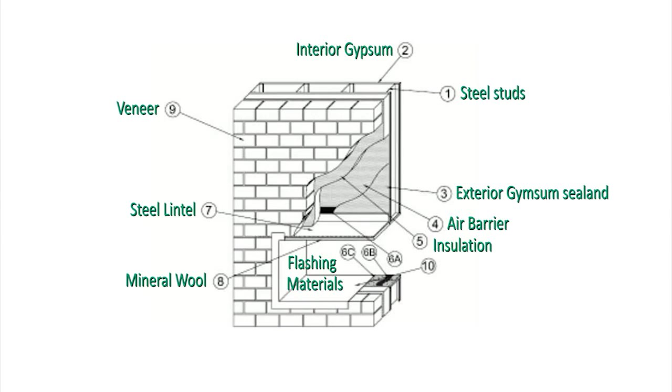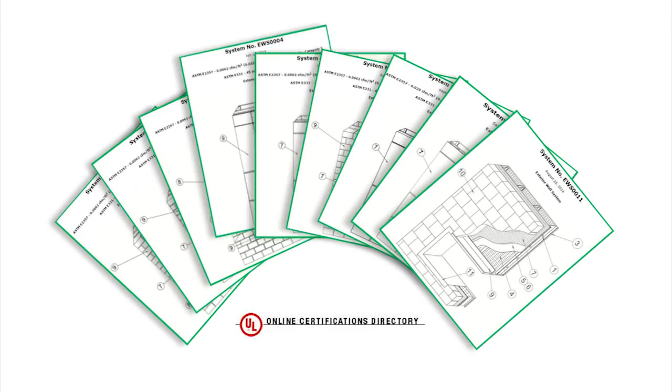In order to meet the NFPA 285 requirement, a wall assembly must contain test-approved products or be reviewed by a qualified engineer familiar with the fire characteristics of building materials. Products have to be evaluated in a variety of NFPA 285 assemblies before a valid engineering judgment can be made. Tremco has multiple tested assemblies listed with Underwriters Laboratories Incorporated that meet the requirements of ASHRAE 90.1 as well as NFPA 285. This makes it easy to identify what system components were tested and evaluated.

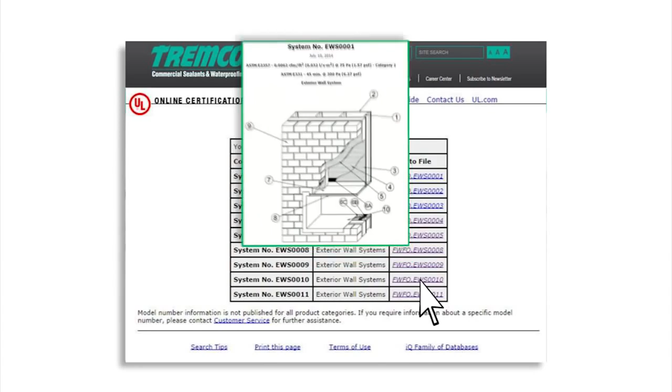To access Tremco UL-listed NFPA 285 assemblies, visit www.tremcosealants.com. Click on Technical Resources on the right side of the toolbar and scroll down to Technical Bulletins. Locate the ASHRAE 90.1 and NFPA 285 defining and specifying to meet IECC and IBC bulletin. Click on the UL listings for Tremco underlined and highlighted in blue. The online UL certifications directory will appear. Type in Tremco and FWFD for the UL category code and then click on Search. The listing of Tremco NFPA 285 assemblies will appear. Click on FWFD.EWS0011 to pull up the EXOAIR 111 NFPA 285 assembly, which contains a detailed listing of the components used.

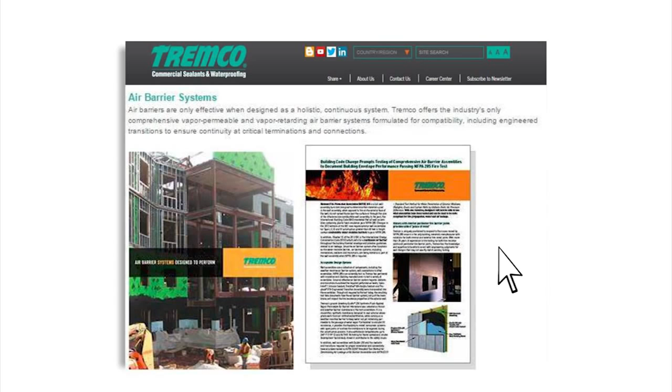When specifying an air barrier system, be sure to confirm with the manufacturer that the product components within the wall assembly have been tested in accordance with NFPA 285. This will help validate your decision.